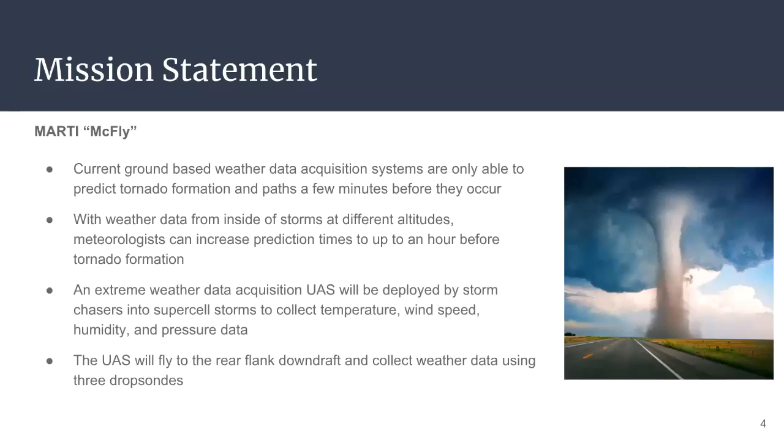This UAS will be deployed by storm chasers into storms to collect temperature, wind speed, humidity, and pressure data. Our UAS will fly to an area of interest called the rear flank downdraft, and it will collect weather data using 3 deployable sensors called dropsondes.

Some of the issues that were raised from MCR include a lack of correlation between our design requirements and the stakeholder. So to remedy this, our team met with a few more stakeholders. We actually got connected with a scientist from the National Center for Atmospheric Research, and this will all be covered in slides 6 to 10.

Another issue was that it was hard for us to test our aircraft in a representative environment to make sure that it would withstand all of the weather conditions. So we looked into impact testing of composite materials, as well as flight testing in inclement weather, and this will all be explained in further detail on slide 28.

And the last issue was that it would be hard for us to waterproof the aircraft, so what we did was we researched similar UAS applications to see how they did their waterproofing, and this will be covered in slide 30.

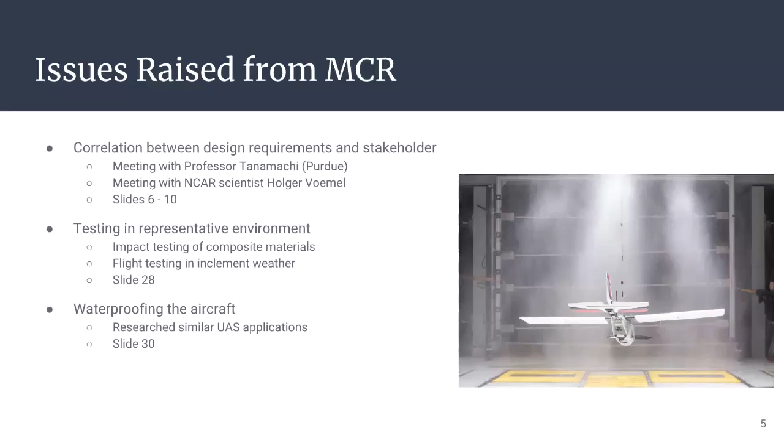So for our mission stakeholder, we have Dr. Robin Tanamachi. She's an assistant professor here at Purdue. She has research interest in severe convective storms and tornadoes, and she helped us by providing a location of interest in these storms, as well as general weather conditions that our aircraft will be expecting. She told us that worst case, we'll be seeing 30 meter per second gusts in all directions, as well as light precipitation.

And she also referred us to the Vortex 2 project that she was involved in. This project was back in 2010. It was the largest tornado research project in history. And part of this project was actually some scientists looked into using UAVs for weather data collection. So we looked at their operations plan and used that to help form our mission profile.

On the left side, we have our flight path diagram. This is an image of a storm. On the bottom, our aircraft is taken off from the ground station, flying 1.5 miles to the rear flank downdraft, deploying 2 dropsondes at 2,500 feet, and then flying this zigzag motion to collect data from both sides of this air mass boundary, and then deploying the last dropsonde, and then returning back to the ground station.

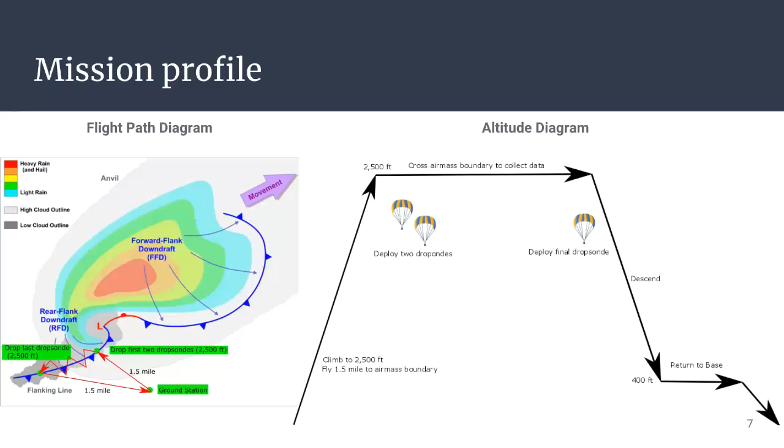On the right is the altitude diagram. Our aircraft will fly 1.5 miles, climb to 2,500 feet, deploy 2 sensors, cross the air mass boundary multiple times, deploy the last sensor, descend, and return back to the ground station.

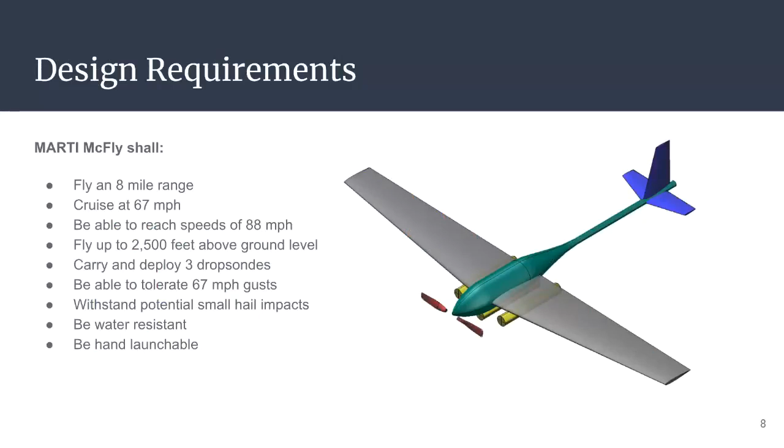So with this, we have our updated design requirements. Our aircraft will fly an 8-mile range, cruise at 67 miles per hour, be able to reach speeds of up to 88 miles per hour, fly at 2,500 feet, carry and deploy 3 dropsondes, which you can see on the right are the yellow cylinders. It will be able to tolerate 67 mile per hour gusts, withstand potential small hail impacts and be water resistant, and it will be hand launchable.

So for our payload stakeholder, we have NCAR scientist Holger. He specializes in sensing and instrument development, and he provided a lot of insight regarding the dropsonde deployment, how they deploy their parachutes, as well as the data transmission. He told us that for our application, it would make sense to use a handheld radio receiver to receive the data real time from the dropsonde.

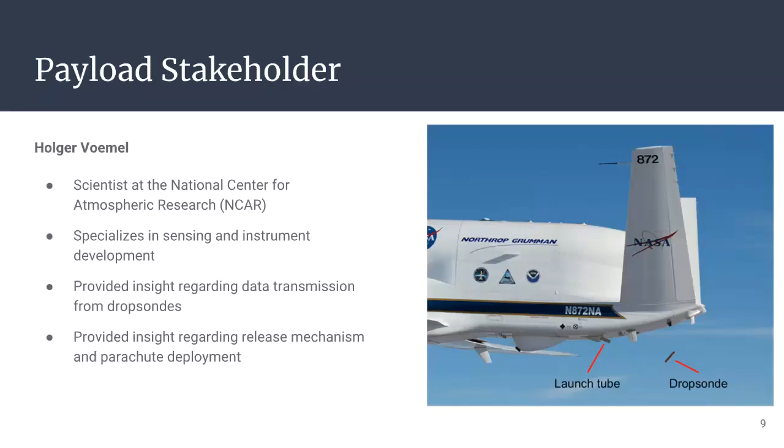NCAR was actually nice enough to lend us a few drop-sondes and the radio receiver all for free, and one of our team members is going to go pick that up soon.

For our payload definition, our aircraft will be carrying 3 NCAR mini drop-sondes. This will allow for a triangulation of weather data. These drop-sondes have built-in sensors that measure pressure, temperature, and humidity, as well as a built-in accelerometer, GPS, and radio transmitter. For dimensions, they are cylinders about 1 3/4 inch diameter, 12 inches long, and each weigh about 0.367 pounds.

They descend at a rate of about 30 feet per second, which is about an 80-second drop when deployed at 2,500 feet.

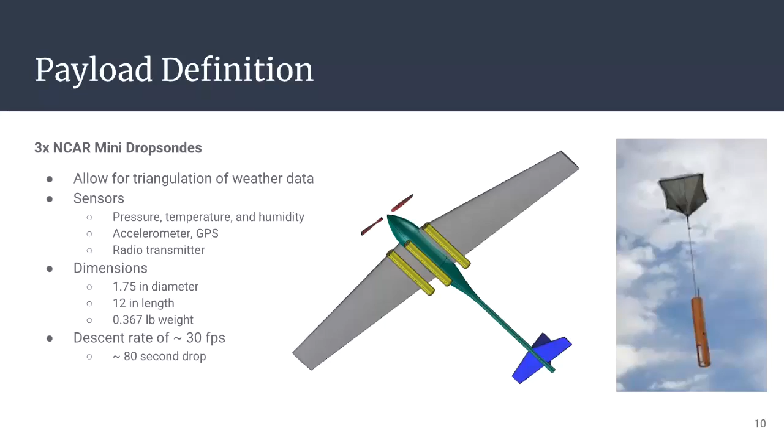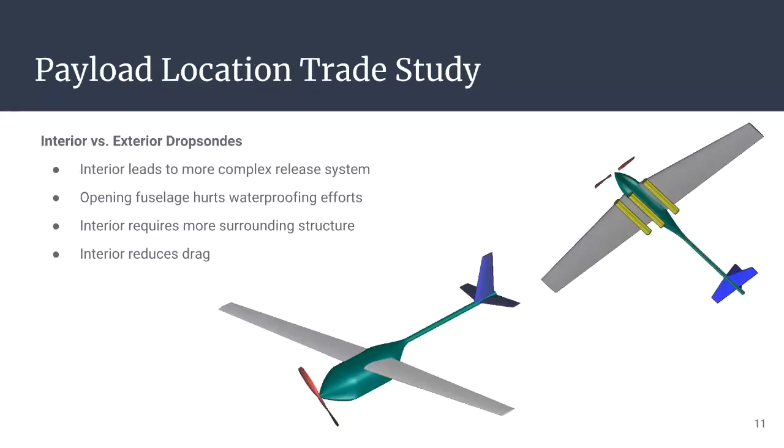For our payload location, we had a short trade study to see how we would mount the payload to our aircraft. We looked into mounting it inside of the fuselage, but this led to a much more complex release system, and having a door in the fuselage that opened would hurt our waterproofing efforts and require more surrounding structure. The only benefit was that it would potentially reduce drag, but we ended up just going with an exterior mounted payload for simplicity, which you can see on the right.

Okay, so I'm going to take it over from here. I'm Stephen from Purdue University.

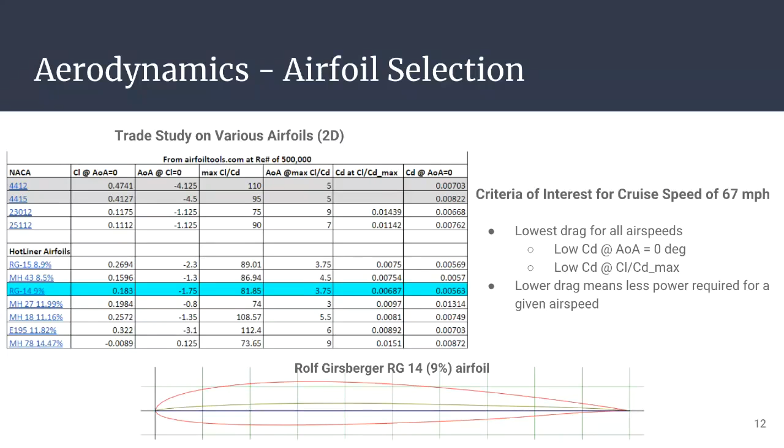That lower drag value would also help us have a less powerful propulsion system, which would be very costly for our application. So for the wing design, we wanted obviously a strong structure.

We wanted low drag. We did a taper trade study, and we found that about 0.5 is suitable for our application, also providing good efficiency. We also wanted to be on the higher side for aspect ratio to lower our induced drag values, and we decided to opt out of dihedral for simplicity and more structure.

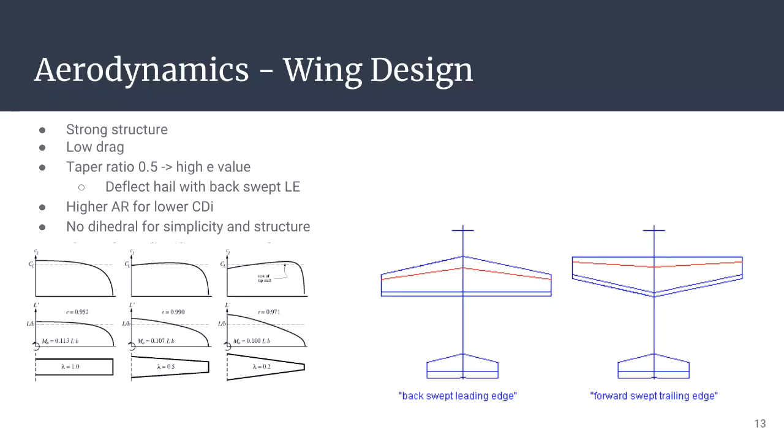On the right here, you can see we considered where we would place our taper - symmetrical on the back side or the front. We went with the option on the left side of this image because of the chance of hail hitting our aircraft; we don't want our leading edge to be damaged. By putting an angle to that, we can have a small deflection of the hail, which increases our chances of survival.

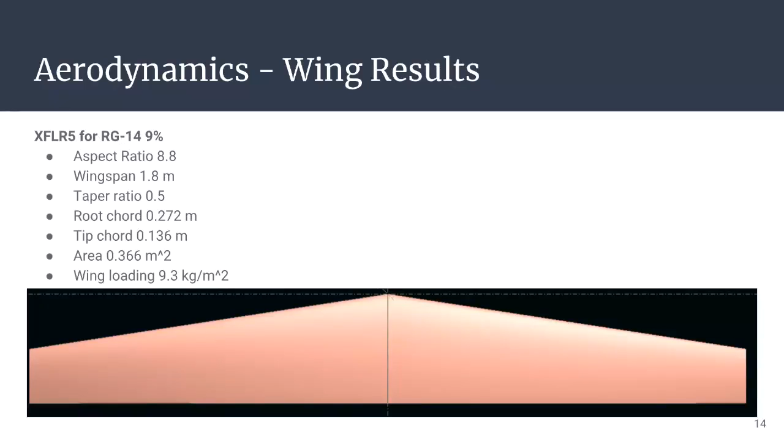So once we put together our airfoil, we went ahead and designed the wing for our aircraft. We have an aspect ratio of 8.8, a wingspan of 1.8 meters, taper ratio of 0.5. Our root chord is 0.272, tip chord is half of that, 0.136, and our area is 0.366 meters squared. Our wing loading is 9.3 kilograms per meter squared, or about 91 newtons per meter squared.

Next thing we did was go on to the tail design to balance out our wing. We went through the standard volume calculations, and we got a horizontal tail with an area of 49 inches squared, span 14 inches, root chord 4.66 inches, aspect ratio of 4, taper of 0.5. Vertical tail: area of 38 inches squared, height 8.7 inches, root chord 5.8 inches, aspect ratio of 2, and a taper ratio of 0.5.

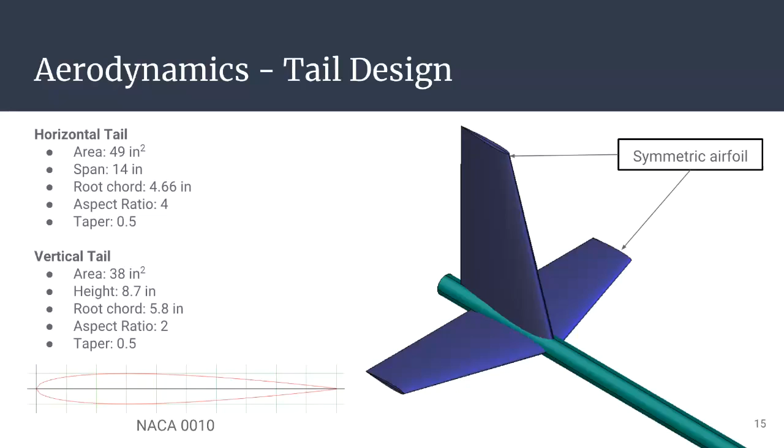We went for the NACA 0010 right now because it just proved to be a very nice fit. If our wing or anything changes, we may consider moving up to a 12, but currently NACA 0010 is perfect for us.

So we went ahead and analyzed all this in XFLR5, and the calculated lift we need at cruise requires a CL of about 0.165. Once we balance out the tail at about a meter away from the wing, we found that our CM0 is at around alpha 0.5, and at that exact same alpha, we have a CL of 0.168. So this balances out really nicely for us.

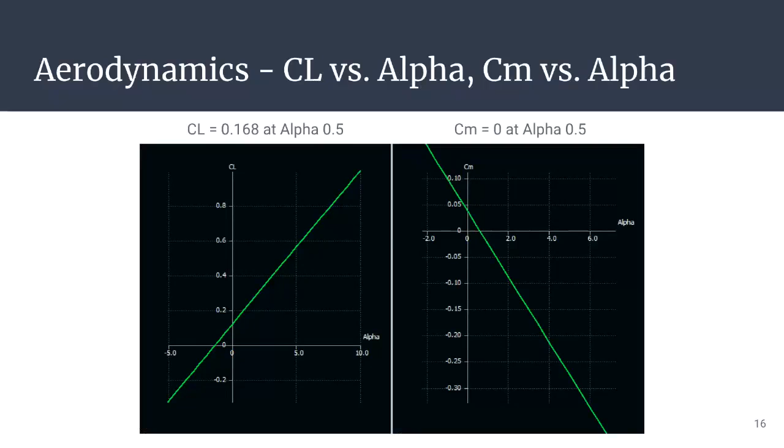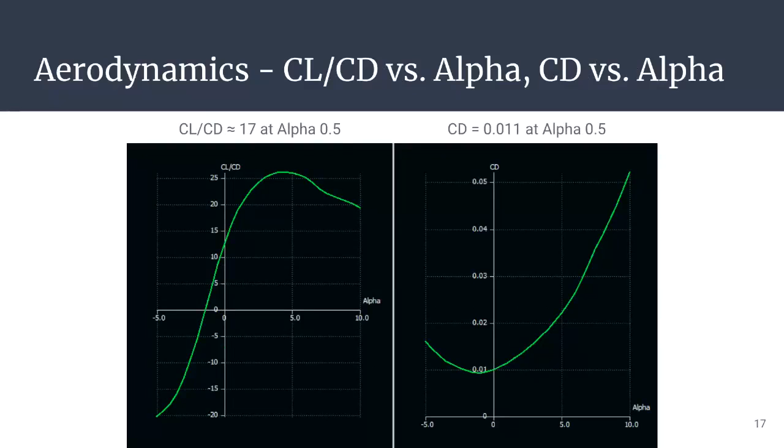Next slide, please. Our CL/CD at that cruise speed is about 17. Then when we pitch up to climb, we get slightly higher CL/CD, which is nice. Our CD is also shown on the right, which is really quite low for this wing and plane in general because of our choices of airfoils.

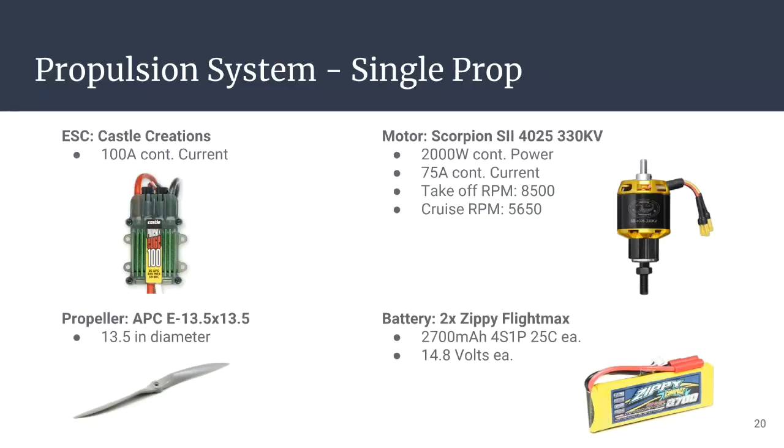However, we wanted some more simplicity in our design, so we went ahead and opted for the single prop since it had a slightly higher efficiency also. This requires an ESC from Castle Creations of 100 amps continuous current, a motor from Scorpion SII 4025 330 kV motor, a propeller from APC E13.5x13.5, and two Zippy Flightmax 2700 milliamp batteries each, 4 cells in series, so we have 8 cells effectively.

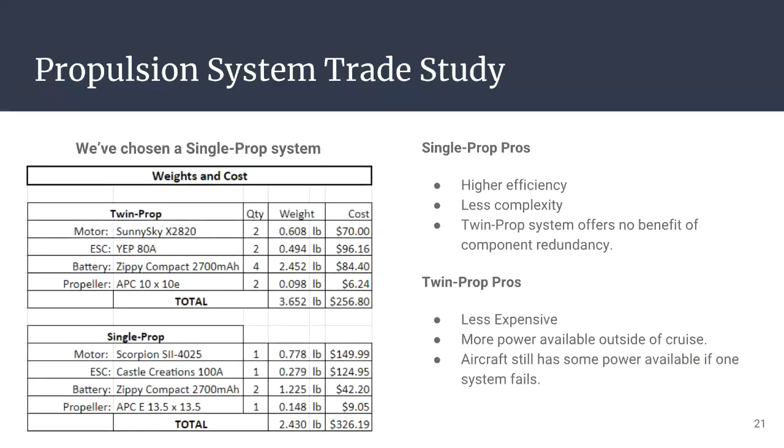So the pros of single props: we have slightly higher efficiency, we have less complexity, hence we have a lot less structure that we have to worry about. The twin prop really doesn't offer too much benefit in redundancy, but the twin props are a little less expensive because the parts aren't so extreme. There's more power available outside of cruise, and the aircraft still has some power available if one system fails.

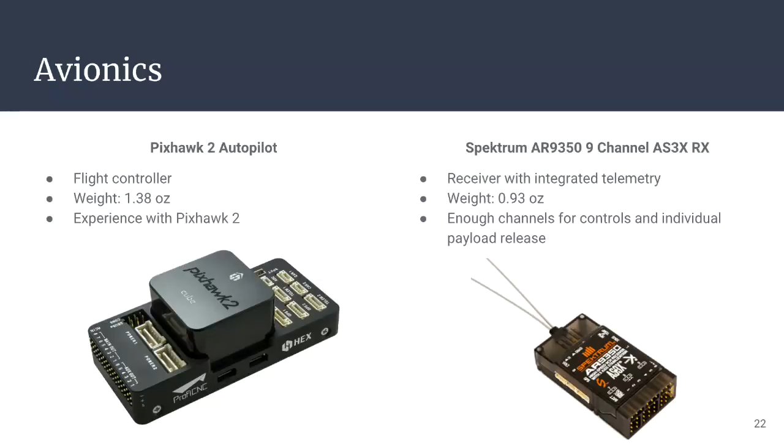For the avionics, we plan to have a Pixhawk 2 autopilot. We'll control this mostly through Mission Planner. For our receiver, we have a Spektrum AR9350, 9 channels, because 6 channels for the aircraft, 3 channels possibly, leaving that room open for the drop-ons.

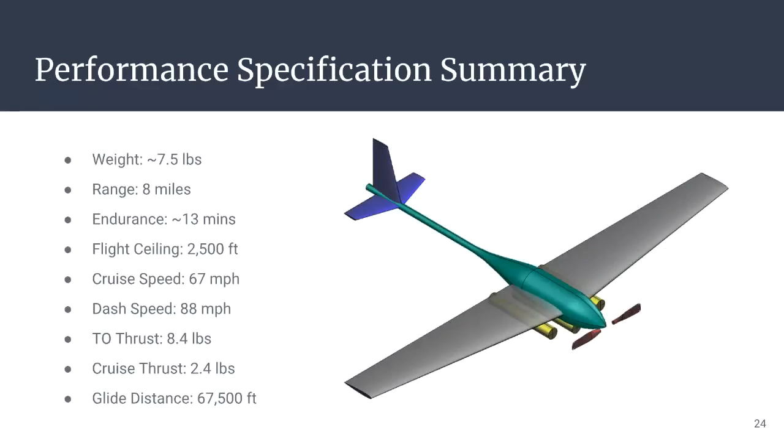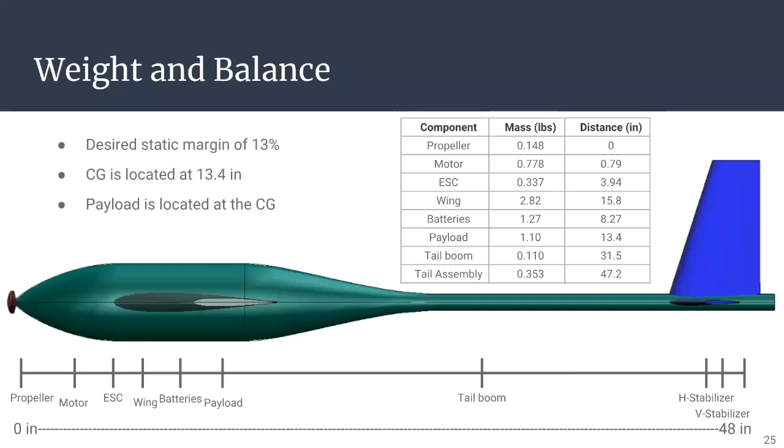For our weight and balance, we wanted a slightly higher static margin because of the strong gusts occurring vertically during this tornado. So we went for 13%, and you can see our chart listing our weights. The payload is located at the CG, so when we drop those, we won't have a problem of our airplane CG shifting and our stability going crazy. The CG is located at 13.4 inches, so that's where we'll put our payload.

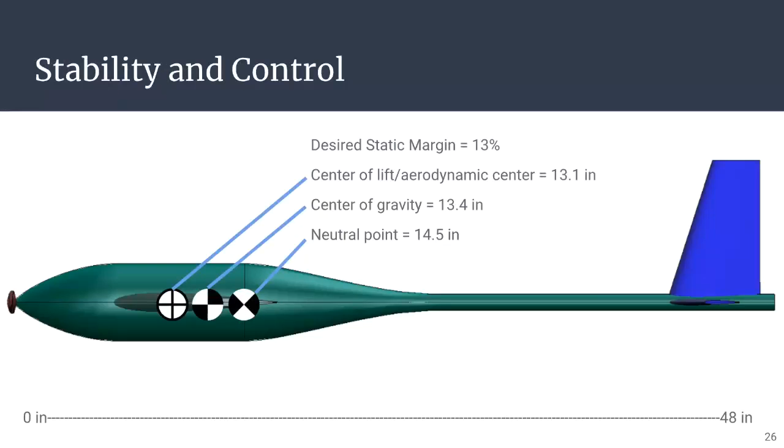So we went ahead and did the calculations. Our desired static margin is 13%, so we calculated for that, and found our aerodynamic center to be 13.1. We placed our center of gravity at 13.4 inches to achieve the static margin, and our neutral point is back at 14.5 inches, and that data is from the last slide.

This is Brenton at Iowa State.

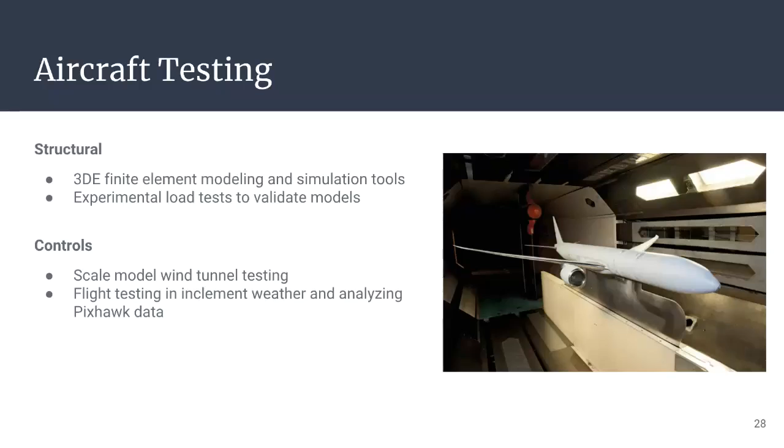For aircraft testing, due to our unique mission, a real-world test of our capabilities will probably not be possible. To overcome this challenge and validate our design in storm conditions, we can perform a finite element analysis or some computational fluid dynamics in computer models. A scale model can also be used in the wind tunnel to test our design at the high speeds we are anticipating. Another possibility is testing our autopilot stability system in less than favorable conditions, such as high wind, not quite a storm, just a high wind day, to see how our control system works with the wind.

For the hail impact testing, as was brought up in our MCR, per our meteorological experts, the worst case scenario for hail that we may encounter is golf ball size. We idealize that as a sphere and estimate that to be about 20 meters per second impact. We could physically test material coupons in different materials to see if they could survive such an impact, and that way validate that our design will be sound for such a mission.

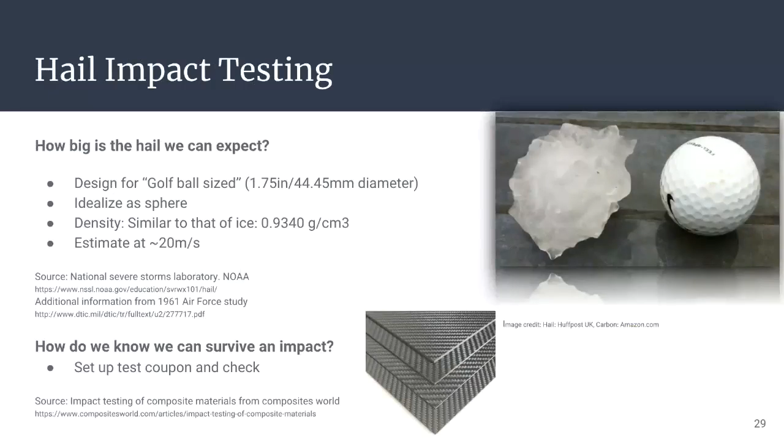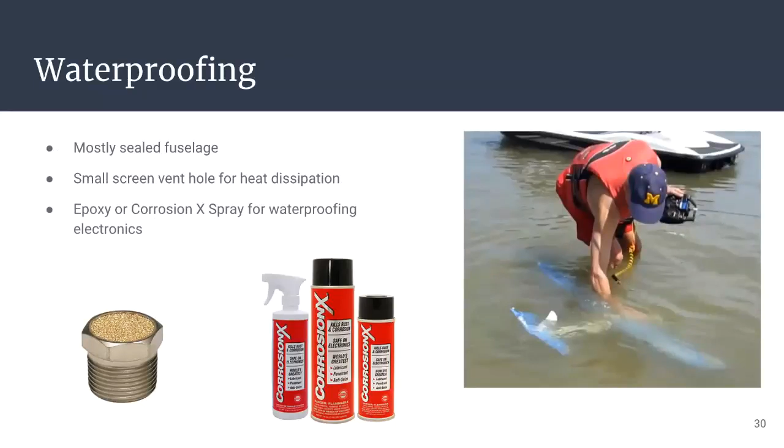For waterproofing, in order to achieve our waterproof design requirement, we designed a mostly sealed fuselage, as was seen with the exterior drop-ons. A small screen vent can be used to keep out water while allowing an air exchange to mitigate the electrical components heating. A sealant such as epoxy or other waterproofing spray can be used to shield the electronics from any possible moisture.

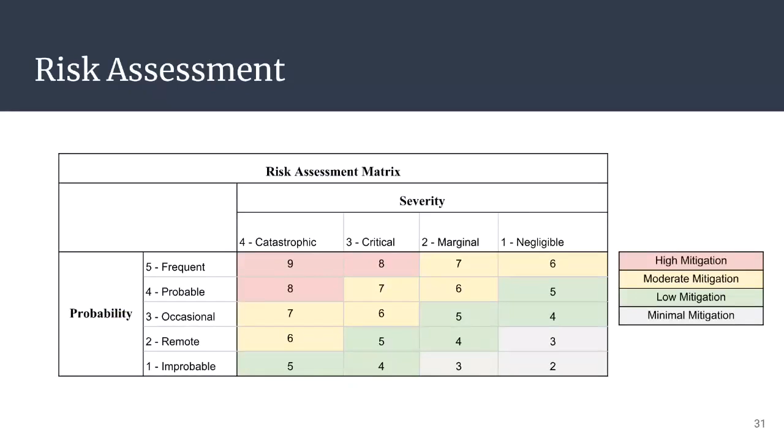For risk assessment, this is a risk assessment matrix which describes the rating of mitigation required for each hazard. A 9, or high mitigation, will mean the mitigation needs to be followed every time and needs to be specific to keep from causing a catastrophe. A 2, or minimal mitigation, means that it should be something we check every couple of flights and should not pose a threat to our mission or people.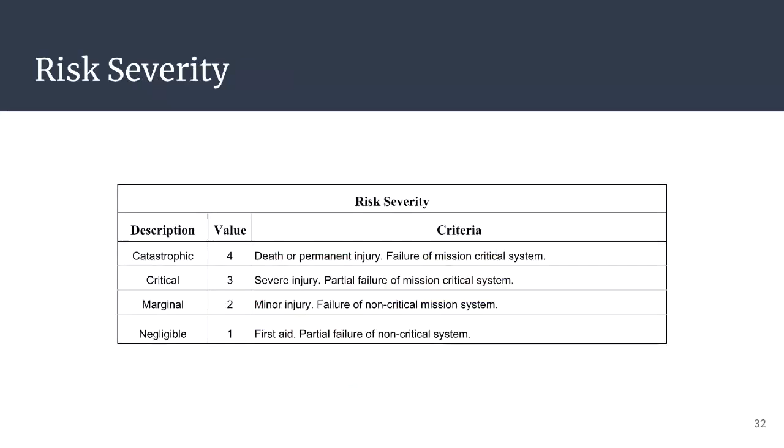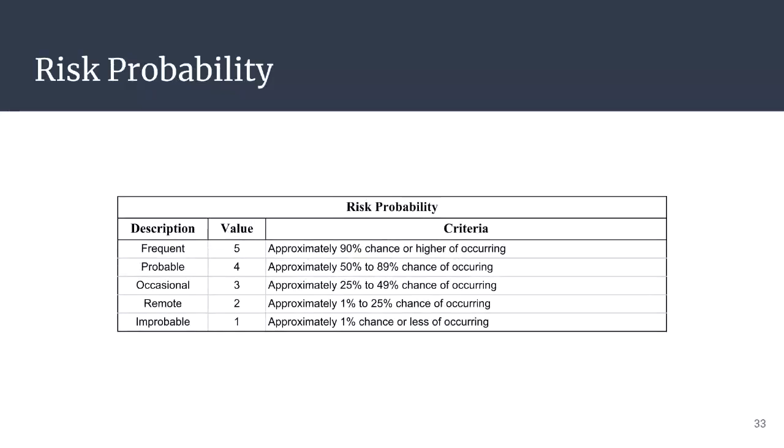Risk severity is how dangerous the hazard would be if it occurred. The danger is measured by a level of injury on a person or the mission systems. Risk probability is how likely the event will occur. We ask people with experience to say how many times they witnessed such a hazard occurring.

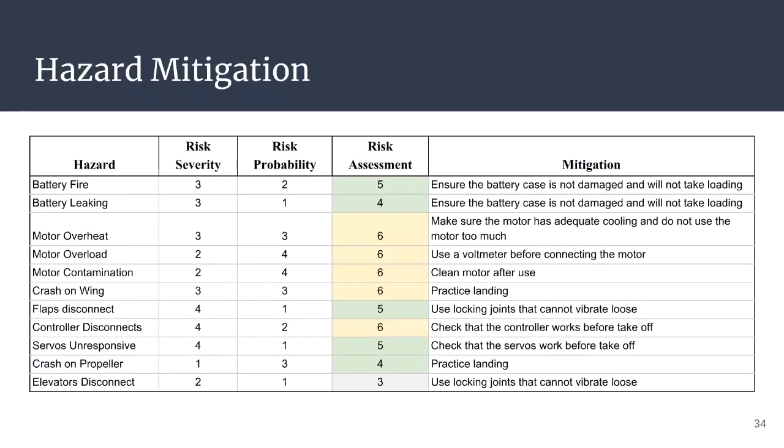All that culminates down into a shortened list that we provided. We have the full list in the appendix. This shortened list of hazard scenarios that we came up with, a lot of mitigation for our hazards has us inspect the aircraft before and after the flight, meaning we'll need to create a flight checkoff list. As you can see, these risk assessment values link back to the previous slides, just discussing how we came up with these values and how we would go about mitigating these risks.

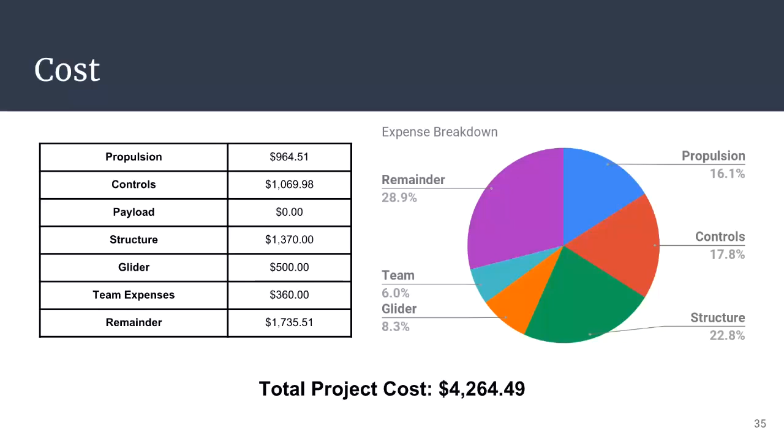Our cost breakdown, the total budget is shown in the pie chart. These exact values are shown in the table on the left. These values are inflated to account for replacement or backup parts, such as extra propellers, ESCs, and other sort of things. Our total cost is estimated at $4,264, leaving a good remainder size for any other unseen circumstances. We have also factored in the glider expense as well.

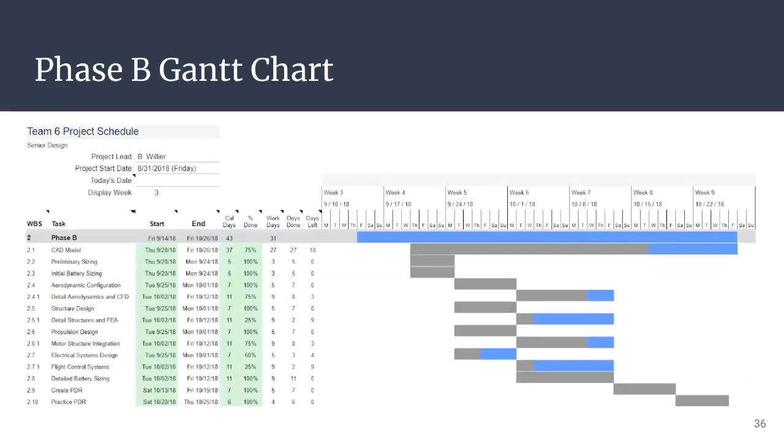This slide shows our Gantt chart to plan and track our progress as we work towards our preliminary design review. We were very ambitious when we set our goals for the detailed design of our craft. Although we did not complete as much of the detailed design as we had anticipated in Phase B, we're still on track and ahead of schedule to enter into Phase C to nail down more of those detailed structures, the FEA, and the CFD.

That concludes our presentation. Thank you for listening, and we will now open it up for any questions.

Good morning, guys. It's Alden Black from Boeing. Great job. Love the mission that you guys picked. You have some pretty interesting and challenging requirements, so I commend you there. And I also like the emphasis you put on really trying to keep your aircraft strong, because you'll be in a very challenging operating environment.